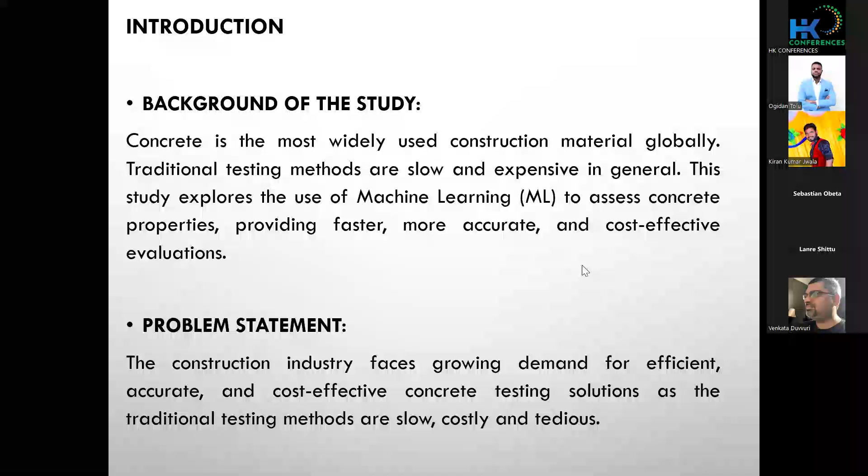Next slide. Okay, just bear with me, please.

The traditional way of testing concrete refers to established methods used to assess concrete properties, and most of the time these methods involve destructive or semi-destructive processes that lead to wastage of materials and errors in measurement, as well as being time consuming and costly. There are different properties of concrete assessed traditionally, but the ones considered in this study are compressive strength of concrete, concrete durability, and image processing in concrete.

Starting with compressive strength assessment, this relies on concrete crushing tests, which are destructive, time consuming, tedious, and costly. Concrete durability evaluates the long-term performance and resistance of concrete to environmental and mechanical stresses, ensuring structural integrity and longevity. This method is also slow, costly, and tedious to carry out.

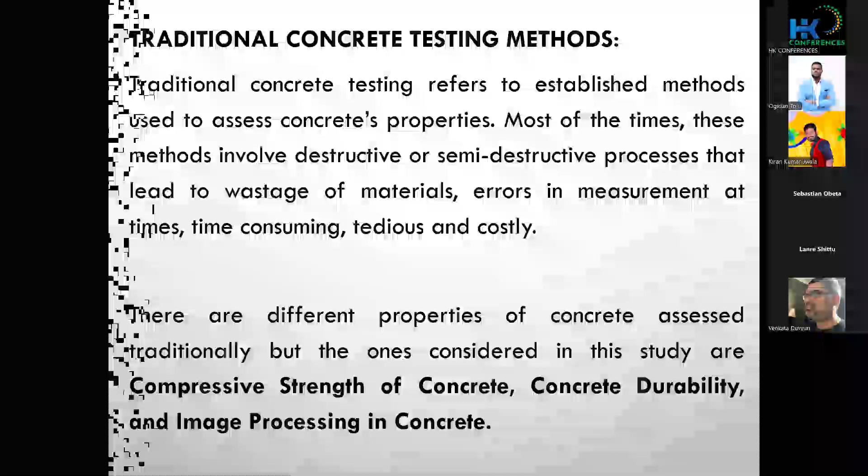Sorry if these images look horrible, this is like 10 years ago. I don't know if this is showing over there. Hello? Yeah, it's not visible. Hello? Can anyone hear me? Oh yes, so I'm showing some images, I don't know if you can see those images from there. Hello? Am I audible? Yes. So I'm sharing some images, just want to confirm if they are visible from there. Yeah, it's visible now, all right.

Okay, that's fine. So these images look horrible, sorry about that, but this was around 10 years ago when I was working as a civil engineer on a construction site back in my country, Nigeria.

These are just some of the samples we take to lab to test. We can see how many they are, and each of them weighs up to 50 kg, they're actually very heavy. So let's say we want to test the compressive strength of columns, which is what we know as pillars.

We start from sample preparation by mixing cement, water, sand, and stones together, and these samples are casted into different shapes, which could be cubes or cylinders. After preparation of the samples, then we...

subject them to what we call curing, that is, keeping them in a big storage tank under water, moisture, and temperature, just to make sure that they achieve their strength, which could take up to 7, 14, 21 to 28 days. After that period, we assume that the concrete samples have acquired the strength, and we then take them to the laboratory to test them.

So when we take these samples to the laboratory, we actually put them under this machine here to crush them. This machine applies pressure to crush those samples, and when we are done, we record the measurements.

It involves preparing and crushing up to 3 samples and finding the average. Now imagine if we want to repeat this process for 200 columns, 200 pillars, and a high-rise building can have thousands of these pillars, and these pillars are just one element, because we still have other structural elements such as beams and slabs. Just imagine performing all of these tests for each element. It's really a lot of work to be done.

These machines we are seeing here, this one, this small one, and the ones we have here, are actually very expensive to set up, and only few laboratories can afford these machines, to the extent that engineers often travel several miles just to complete this testing process in the laboratories. So we can see that the traditional method is destructive, as it requires physical samples to be crushed during testing, and it's time consuming, costly, tedious, and prone to errors.

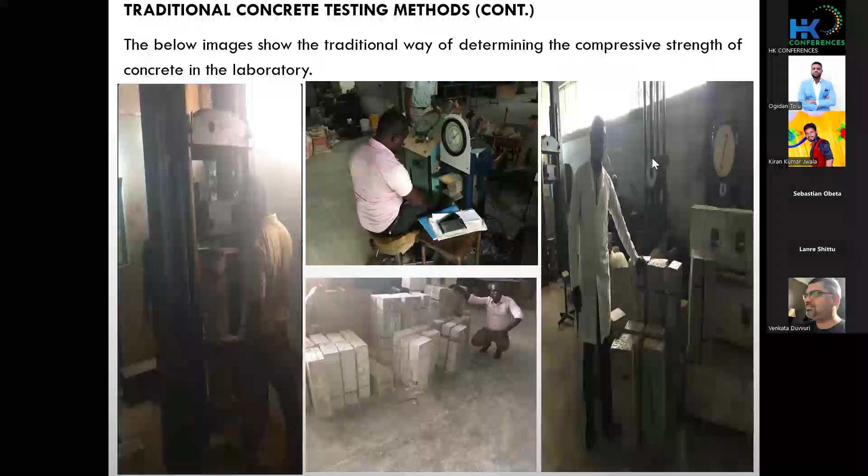Aside from compressive testing of concrete, the other testing we have is durability testing of concrete. This involves sample preparation, which I discussed earlier, then curing, then testing. But under durability testing, it involves more than one test. The previous one was just compressive testing, but this one has a chloride penetration test, a carbonation depth test, freeze-thaw resistance, and abrasion resistance.

So this process is tedious as well for durability testing of concrete. It also comes with human error, is time consuming, and because there are several steps involved, it makes this process tedious and raises safety concerns. Next slide.

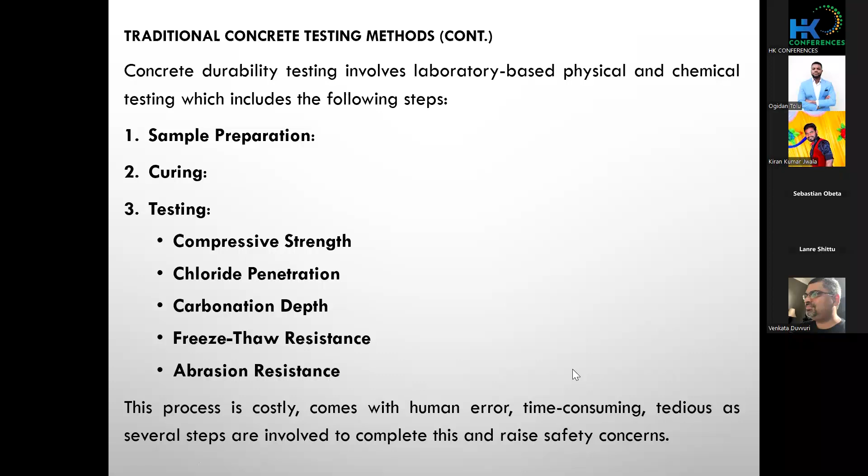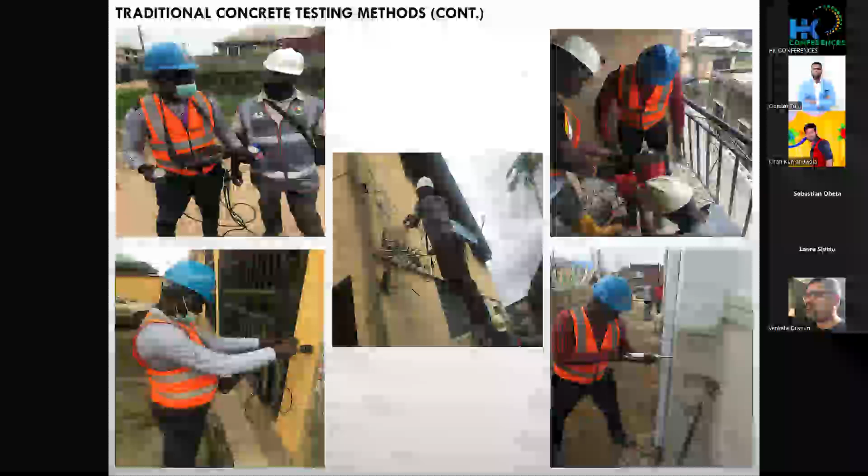So, next slide. Uh, okay, I think it's up now. Yeah, it's okay. I'm so sorry, my system is extremely slow from here.

So sorry about that. So from all of this, there has been a great need for faster, cheaper, less stressful, more accurate, and sustainable concrete testing methods in the construction industry.

And with the advancement of AI, the concrete testing process has actually been optimized, addressing most of the shortcomings of the traditional ways. Several machine learning techniques, including gradient boosting regression, extreme gradient boosting, support vector machines, artificial neural networks, and more, have demonstrated over the years superior performance in predicting concrete mechanical properties.

So let me move to the next slide from here. This is just too slow. So sorry about that.

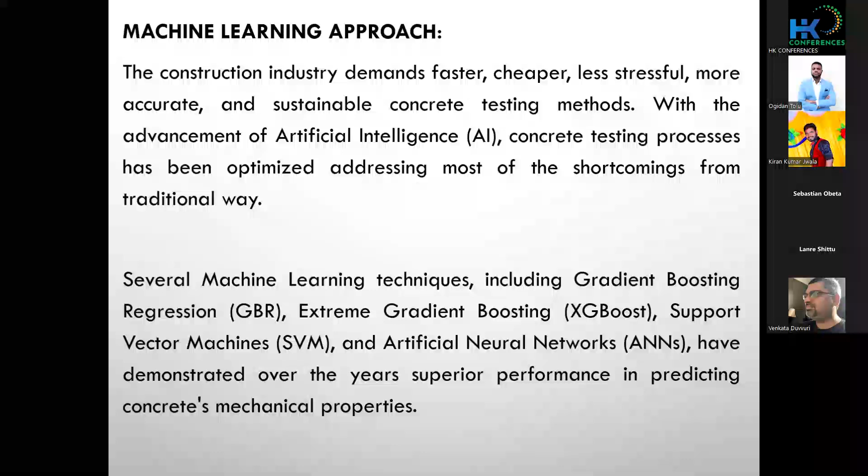Mr. Lanre, can I share from my end? Okay, let me just send you what I have here. Sorry, just bear with me please, because what I have here is not what you have there. Just bear with me while I share what I have here. Or do I just go ahead with what I have on the screen now? Yeah, it's okay, it's visible. Okay, sorry, my system is just acting this way, sorry please.

Okay, so starting from predicting compressive strength of concrete with machine learning approaches, over the years several researchers have actually utilized this technology to determine the strength of concrete.

Starting with Ghunimat et al., they performed an experiment where they predicted the compressive concrete strength with random forest regression and k-nearest neighbor. They found that random forest regression actually predicted best with a correlation coefficient of 0.973, which is high enough.

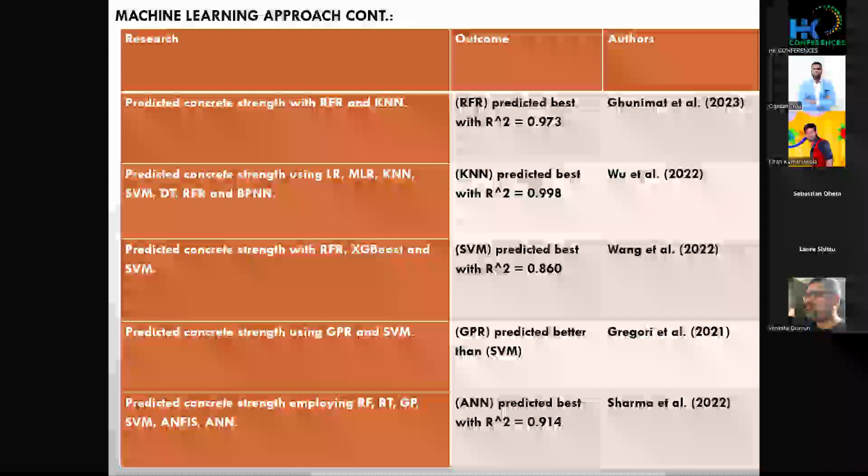Secondly, an experiment performed by Wu et al. predicted strength of concrete as well, but this time using logistic regression, multiple linear regression, k-nearest neighbor, support vector machine, decision tree, random forest regression, and backpropagation neural network. In this case, it was observed that k-nearest neighbor predicted best with a correlation coefficient of 0.998.

This was followed by a third experiment by Wang et al., who predicted the compressive strength of concrete containing ground granulated blast furnace slag, using random forest regression, extreme gradient boosting, and support vector machine. In this case, they observed that support vector machine predicted best with R-squared equal to 0.86.

Likewise, an experiment performed by Gregori et al. assessed concrete strength with Gaussian process regression and support vector machine, and from here we can see that Gaussian process regression performed better than support vector machine.

Lastly, an experiment performed by Sharma et al. in 2022 also predicted compressive strength of concrete using machine learning models, including random forest regression, genetic programming, support vector machine, adaptive neural fuzzy inference system, and artificial neural network. They found that ANN, artificial neural network, predicted best this time around with R-squared equal to 0.914. So these are all the past researches

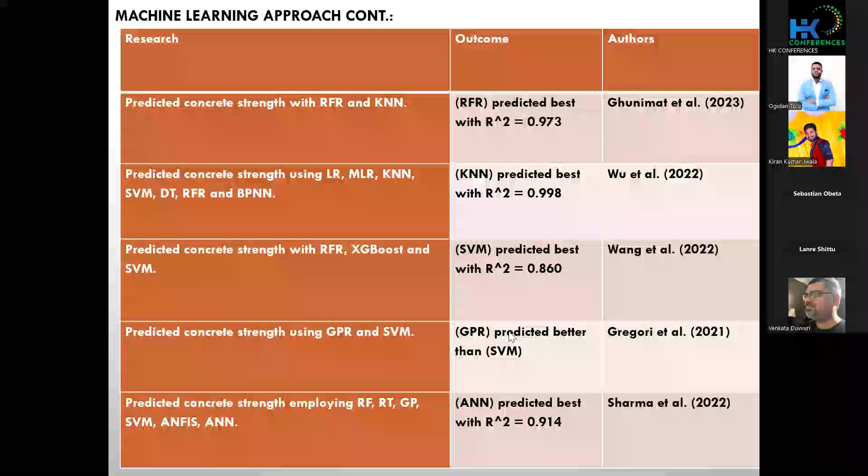I hope this is okay. So I have another table here before me. I don't know if that is showing over there.

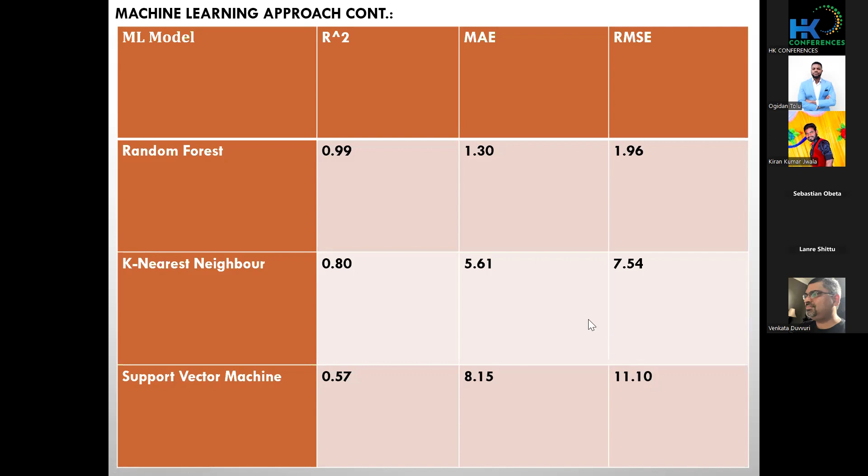All right, thank you. Assessing the durability of concrete is a major requirement in the construction industry. For instance, degradation due to corrosion in concrete structures is a significant global issue, costing billions annually in repairs and maintenance. Western Europe alone spends around 5 billion euros yearly on rust related damage, making repairs costly and time intensive.

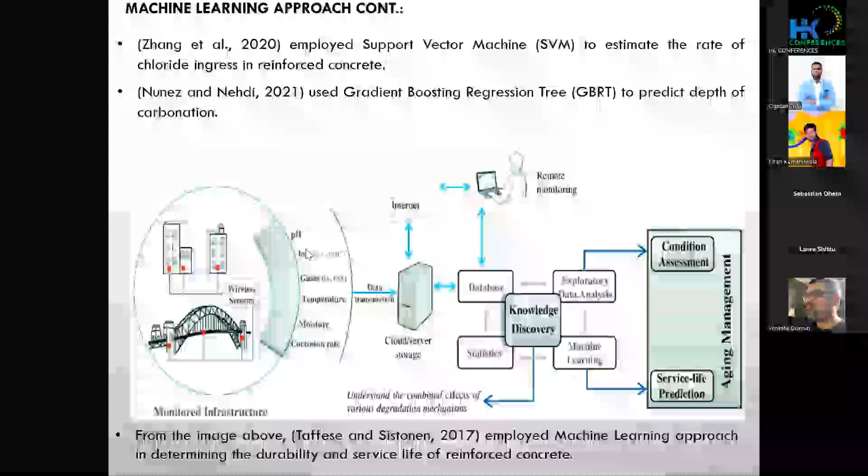So all of this setup we see, the aim is to determine the durability and service life of reinforced concrete. Let me move to the next slide.

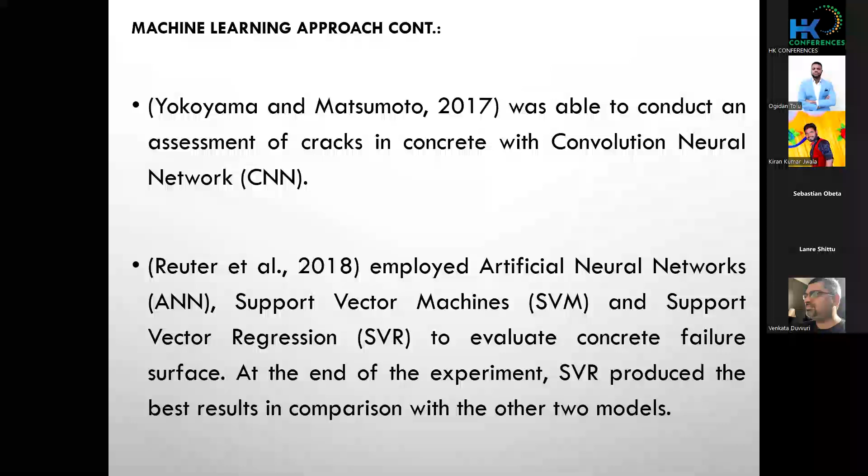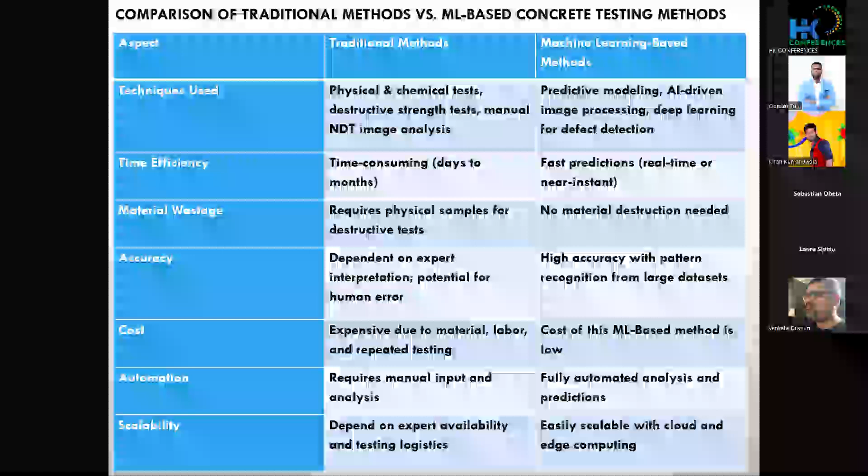These are AI driven image processing - oh sorry, let me go to the next one. As for time efficiency, the traditional way takes time to complete, in days, and at times this process takes weeks or months, but the machine learning approach is fast.

And for material wastage, from the images I shared, the traditional ways involve physical samples being destroyed. While this is not so in the case of a machine learning approach. In terms of accuracy and cost, the traditional way is prone to errors and is costly, while the reverse is the case for machine learning approach.

And lastly, as for automation and scalability, the traditional ways require manual input and depend on expert availability, while the machine learning approach is automated and easily scalable. Next slide.

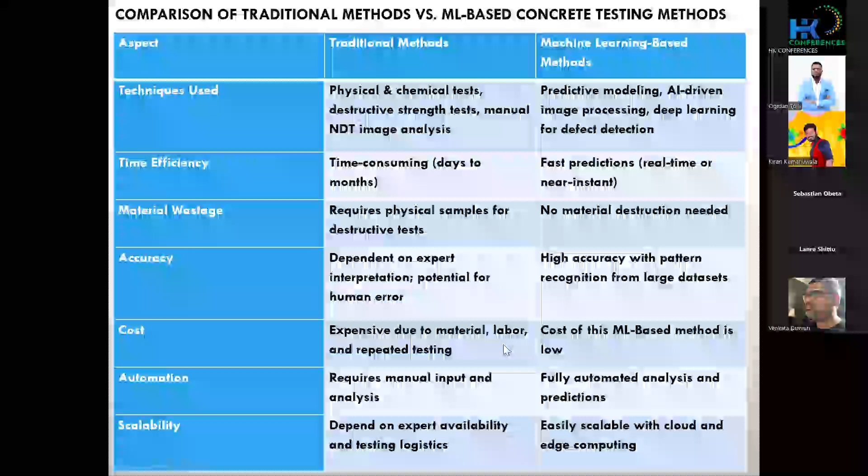It's visible. All right, thank you. Thank you.

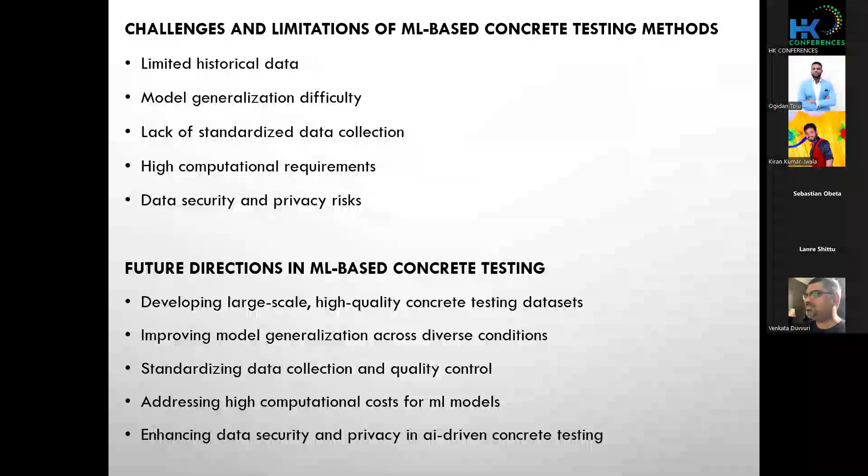So, okay, is that showing as well? Sorry Kiran, it's visible. Is all right, thank you.